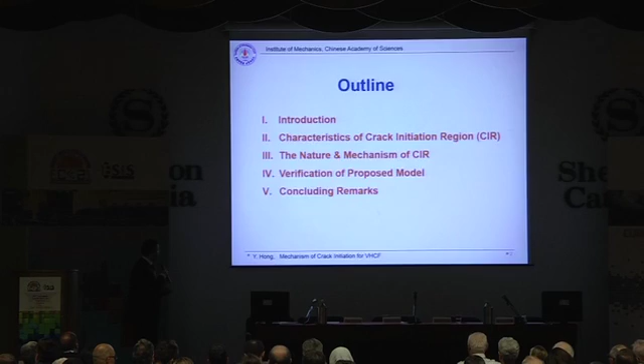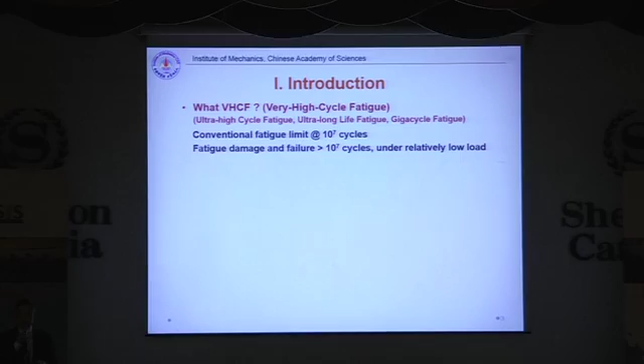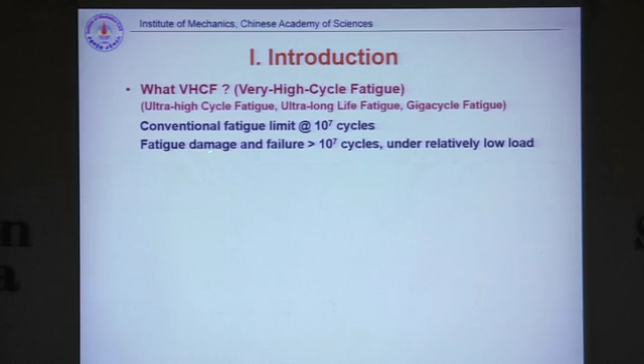First, I would like to mention what is very high cycle fatigue. I think all of us know that the conventional fatigue limit is regarded as the fatigue strength at loading cycles of 10 to the 7. But in recent decades, there are quite a number of research investigations reported that fatigue failure may happen beyond 10 to the 7 cycles of loading, and the related fatigue strength is below the conventional fatigue limit, so this is called very high cycle fatigue.

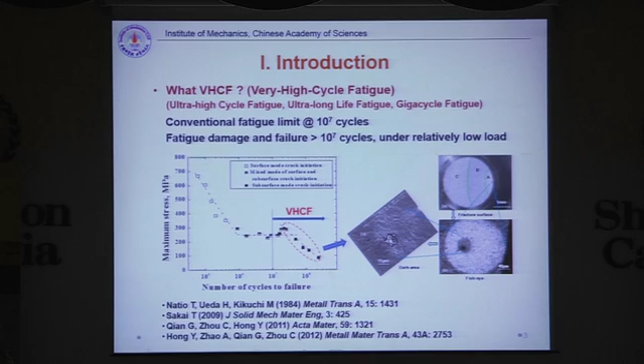This brief example showing in this area is very high cycle fatigue. For very high cycle fatigue, the crack initiation is always from the interior or subsurface of the specimen, and the morphology I will mention in the following slides.

We know that for many engineering structures and components, they all require a large number of more than 10 to the 8 cycles of safe loading. So very high cycle fatigue has very important engineering applications.

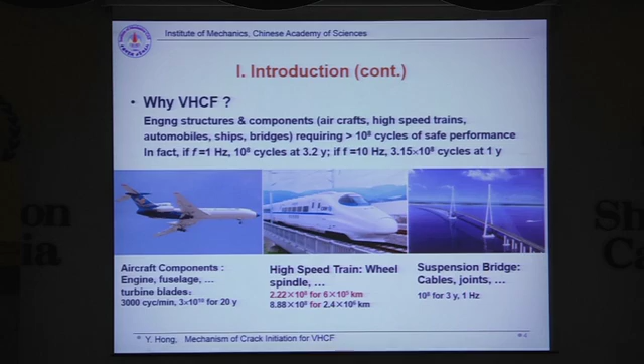This is another example showing what happens in very high cycle fatigue. It shows the crack initiation morphology is a kind of fisheye pattern and also a rough surface of fine granular area. This tells us that for very high cycle fatigue, the mechanism is different from what we know of low cycle and high cycle fatigue.

For that, the crack initiation is always from the surface due to some kind of PSB mechanism. But for very high cycle fatigue, it's from the subsurface or interior of the specimen, so the mechanism is quite different.

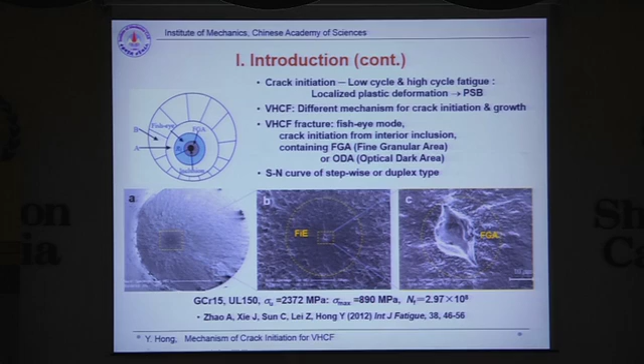So in my talk today, first I will show the characteristics of crack initiation for very high cycle fatigue. Then I will try to answer 2 questions. The first question is, what is the nature of crack initiation for very high cycle fatigue? The second question is, what is the mechanism for the formation of this region?

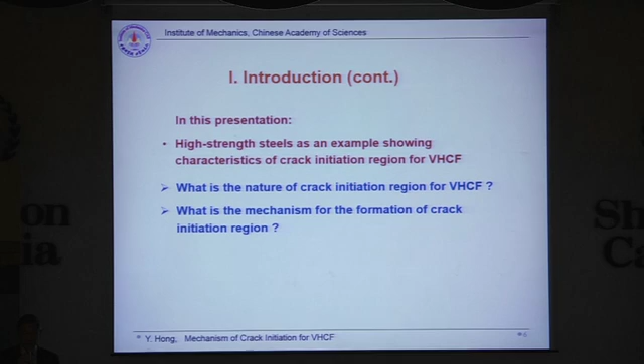Again, this is an example showing the crack initiation of very high cycle fatigue is from the subsurface of the material. For this case, we see there's a morphology called fisheye, and in the center is a kind of rough surface called fine granular area, due to an inclusion as crack origin. For this case, the size of FGA is about 66 microns, and the fisheye is about 206 microns. So now we may have an idea of the size of FGA and fisheye.

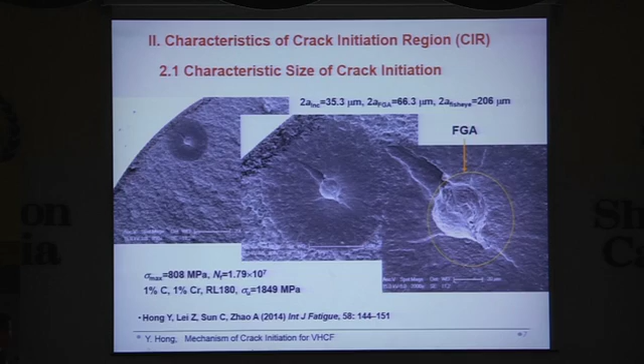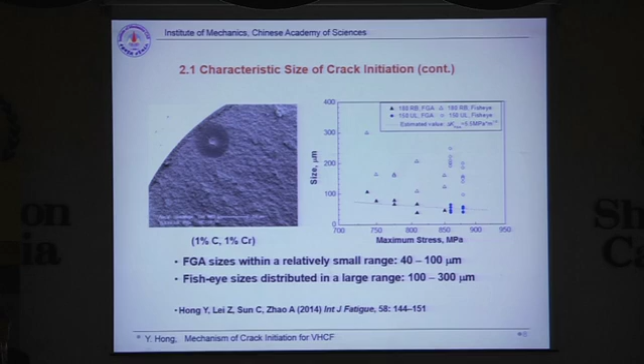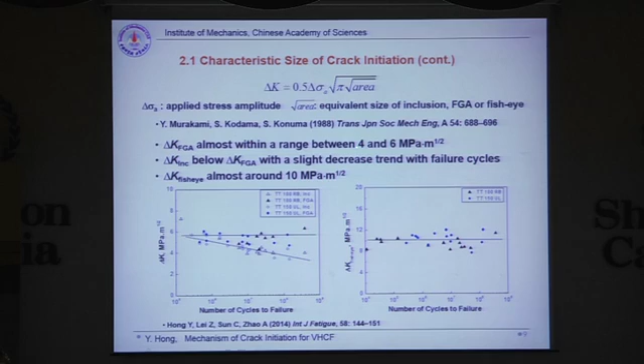We measured a number of specimens to show that the size of FGA is between 40 and 100 microns. We also calculated the delta K for the crack initiation region, that's delta K FGA, and the results show that this value is quite stable. It's between a range of 4 and 6 megapascal square meter.

Then we collected a large number of data from our results and also from literature, and we put two curves. This is an upper bound of 6 megapascal square meter and a lower bound of 4 megapascal square meter. We may see that almost all the data are within this range. Not just our results, but also the results from literature, so all of this data is within this range, meaning that this value is quite stable.

Therefore, we said that this size, the size of FGA, for the crack initiation process, is a kind of intrinsic dimension for crack initiation in very high cycle fatigue. This is our idea, our consideration.

From this kind of consideration, we are able to calculate the fatigue life consumed in this region during crack initiation, and also we are able to estimate the crack extension rate within this small range.

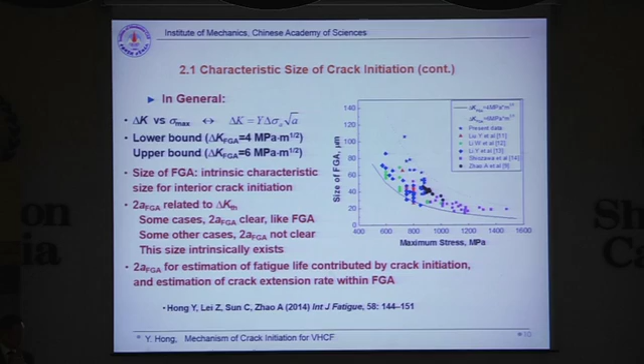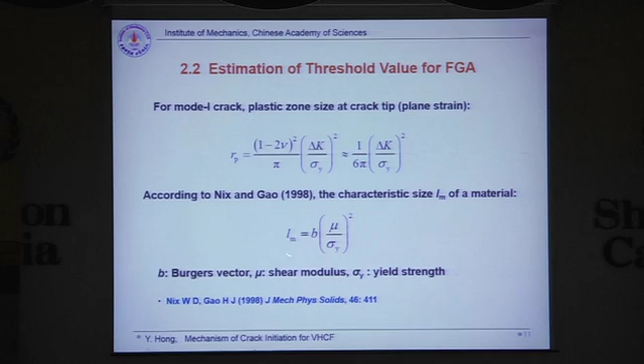But we would just like to take advantage of two formulas of plastic zone size and also the characteristic size of material. We assume that the plastic zone size of the crack equals the characteristic size of the material, so the formation of this crack initiation zone is completed. Under this simple assumption, we come up with this result showing that the value of delta K for FGA is just a function of the shear modulus and Burgers vector of the material.

For this equation, we get the result for steels as 5.5 megapascal square meter. It's in good agreement with my previous slides of 4 and 6 megapascal square meter.

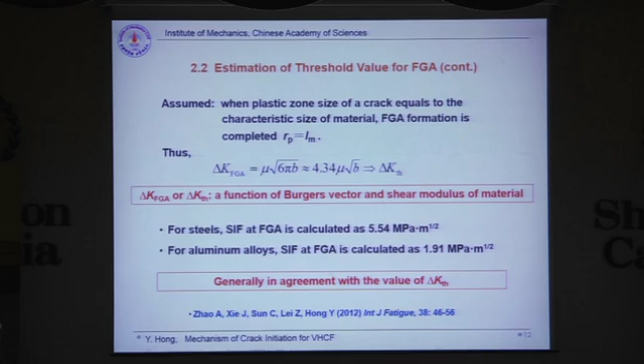Now I will show you the results, the estimations of fatigue life, and the crack extension rates within this small range.

The idea is that the life for initiation is the total number minus n sub 1 and n sub 2. N sub 1 is from the FGA to the boundary of fisheye, and n sub 2 is from there to the final fracture point.

We have the total number of fatigue life, or loading cycles. If we can get n sub 1 and n sub 2, we can obtain the life for crack initiation, using the Paris relation to calculate n sub 1 and n sub 2.

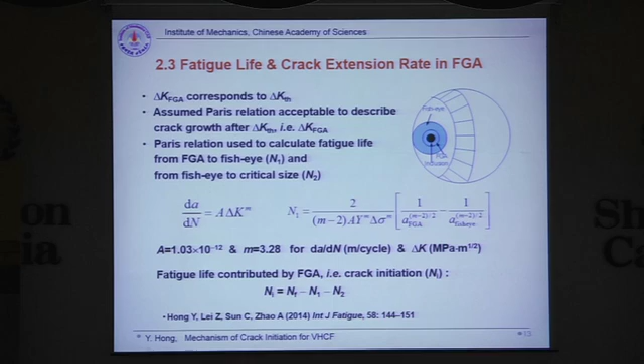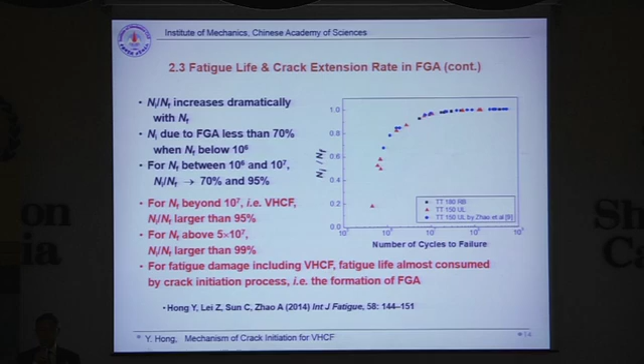We also estimate the crack extension rate within this small range of crack initiation. The value is 10 to the minus 12 to 10 to the minus 13 meters per cycle, which is very, very slow.

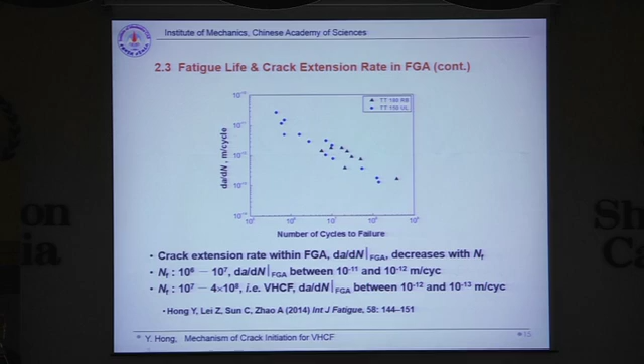So I'll summarize the previous slides for very high cycle fatigue of high-strength steel. First, the crack is initiated from the interior material. Second, the morphology shows fisheye and FGA patterns. Also, the value of delta K is stable and is a function of Burgers vector and shear modulus of the material. A large part of fatigue life is consumed by the crack initiation process.

Finally, FGA, the crack initiation region, is the characteristic region for crack initiation in very high cycle fatigue. So now we understand that the initiation process is very important.

Therefore, we ask two questions. First, what is the nature of FGA? Second, what is the mechanism of this region's formation?

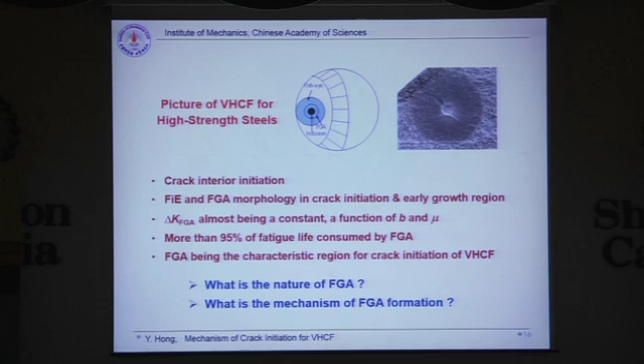Before describing our results, I would like to briefly mention some previous models. The first is hydrogen-assisted crack growth to form the FGA region. The basic consideration is that this type of rough surface is due to the existence of hydrogen inside the material, and the interaction between hydrogen and material defects or damage causes this rough surface during fracture.

The second model is called decohesion of spherical carbides to form the FGA region. The basic consideration is that because there's an existence of spherical carbides in the steel, the bonding or cohesion between the carbides and the material causes the formation of a rough surface during fracture.

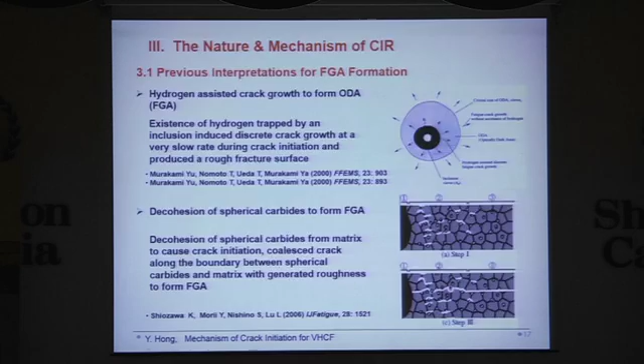The third model is called formation and debonding of the fine granular layer. The main consideration is that before crack growth, there is a kind of plastic deformation causing the formation of a fine granular layer. During the cracking process, there is a debonding between the fine granular layer and the matrix.

This causes the morphology of a rough surface. There are also a couple of additional models similar to this debonding of the fine granular area to form this kind of rough surface.

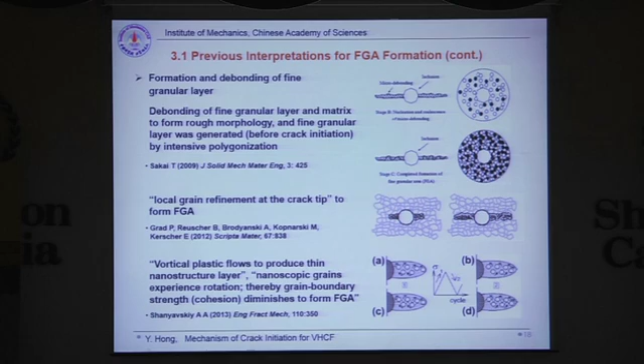But these types of models cannot explain some experimental observations. I will show you some cases.

This one is a kind of medium carbon steel. We may see a morphology of fisheye pattern, but there's a very clear initiation region without the morphology of so-called FGA.

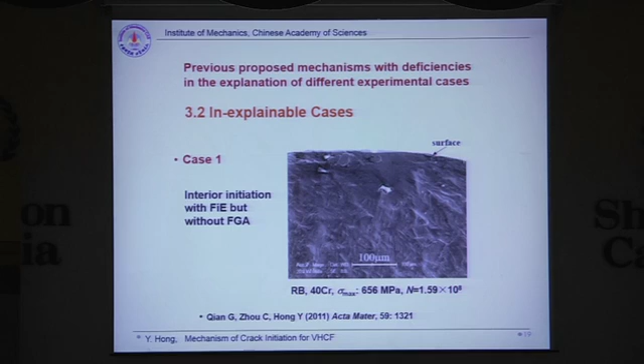The second case is also from a kind of medium carbon steel, and we also see the morphology of fisheye, but without FGA pattern.

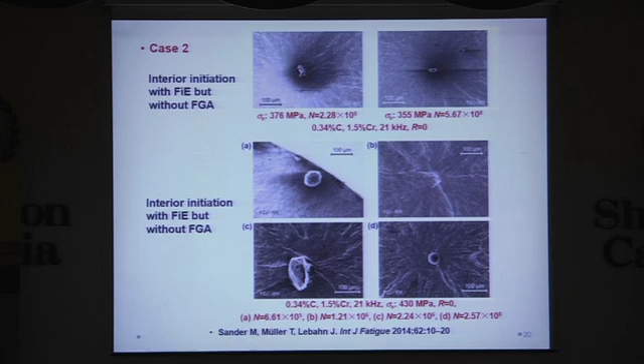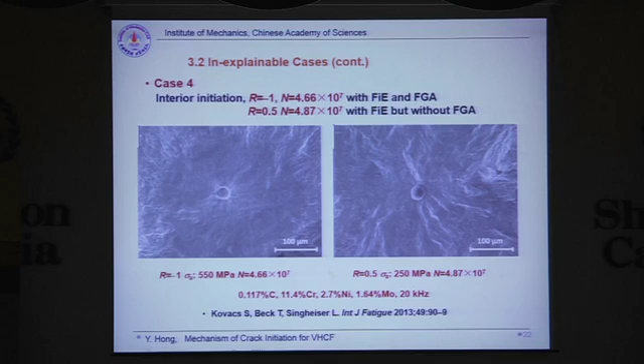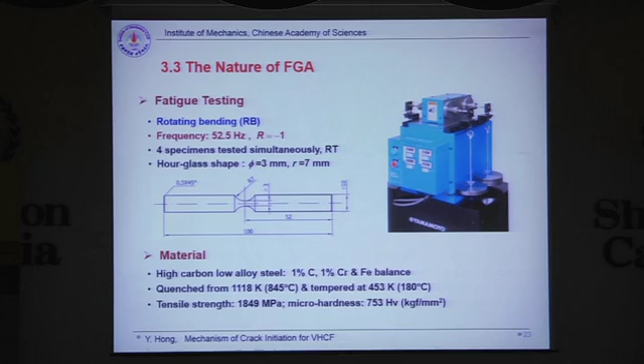Therefore, we try to reveal the real nature of this very important region that consumes such a large part of fatigue life. We use the ordinary rotating bending method, with stress ratio of -1, and a high strength steel for this testing.

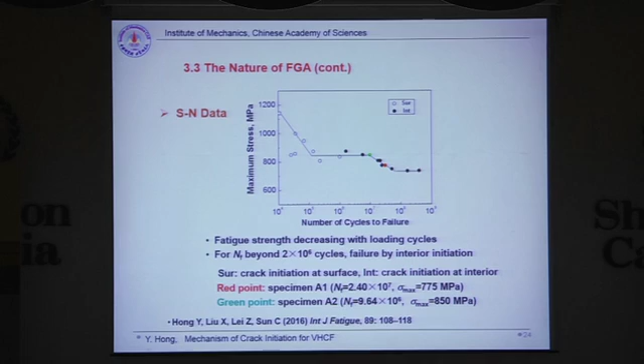From this fatigue data, we chose two specimens for detailed observation, the green one and the red one. The red one failed in a very high cycle fatigue regime.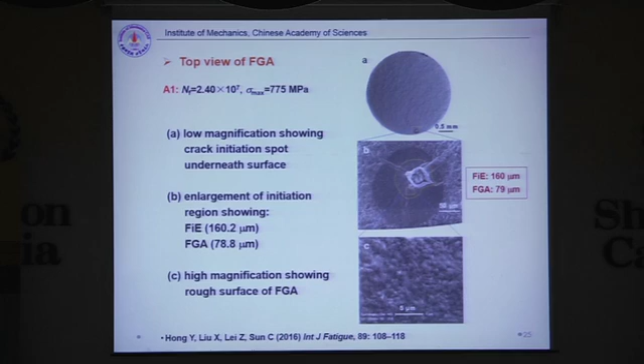There's a top view from low magnification to high magnification showing a rough surface during the crack initiation process. Then we used ion beam polishing to get a kind of profile sample, and we observed this initiation region.

In this initiation region, we see a kind of layer about 650 nanometers of rough surface.

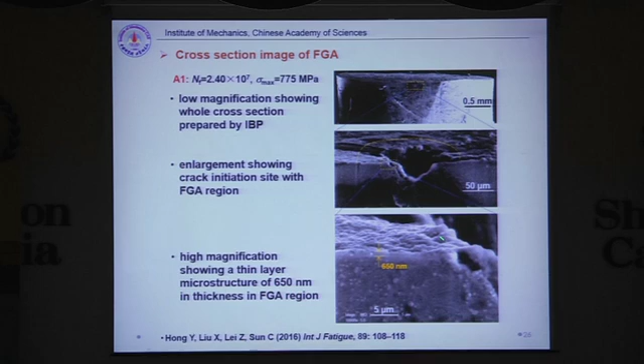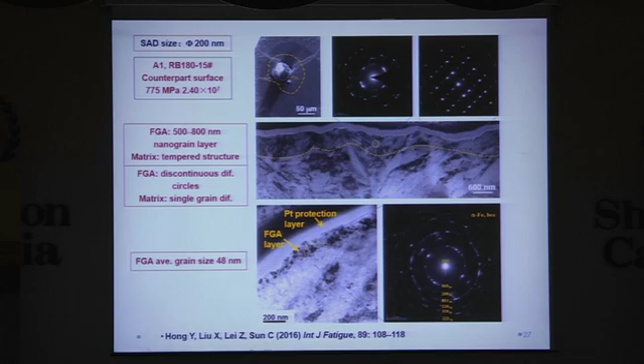Then we further used the technique of focused ion beam cutting, to cut the specimen at the location of crack initiation region. The TEM image shows that underneath the fracture surface is the region of FGA, a kind of fine microstructure, while inside the fracture surface is a kind of coarse microstructure.

We also used selected area diffraction, SAD, with a size of 200 nanometers. We saw that at the location of the FGA region there are discontinuous circles, but inside the specimen there are isolated spots, meaning that area is coarse microstructure, while the FGA is fine structure, meaning there are a number of grains inside this small 200 nanometer area.

This is another result showing that in the region of the FGA area, the diffraction shows discontinuous circles, and our measurement shows that the grain size is 48 nanometers on average.

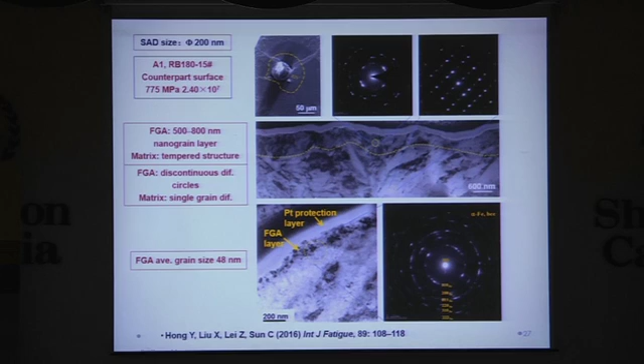Then we observed another specimen, the green specimen, using both fracture surfaces, the negative part and positive part. We cut the FIB sample from almost the same location to see how the morphology compares on both sides of the specimen.

For this negative and positive fracture surfaces, we see that at the FGA location there are discontinuous circles. Outside, we cut the FIB sample just between or across the boundary of fisheye and FGA, so part of the FIB sample is FGA region and another part is fisheye outside FGA.

This shows that the part outside FGA is almost all isolated spots, so only the region of FGA is a kind of fine microstructure, and again in the area of FGA there are discontinuous circles.

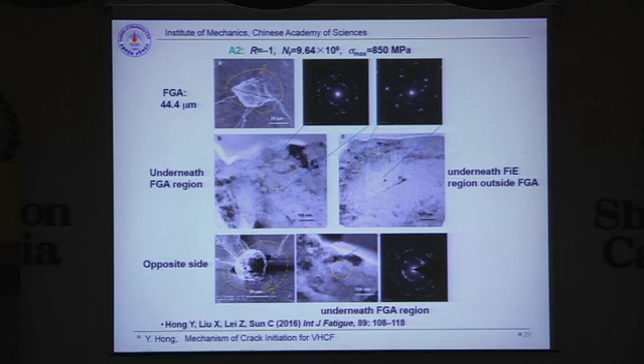Therefore, we propose this kind of model called Numerous Cyclic Pressing, NCP. It says that first, a crack will form, perhaps by the debonding of inclusion and matrix, with some kind of localized plastic deformation.

After the formation of the crack, there will be a kind of contacting between the crack surfaces. This type of contacting is associated with the crack closure effect and also the relaxation of residual stress, and this process repeats again after millions of cycles of loading. This is the main concept of our model.

Due to this kind of contacting between the originated crack surfaces, such a nanograin layer is produced.

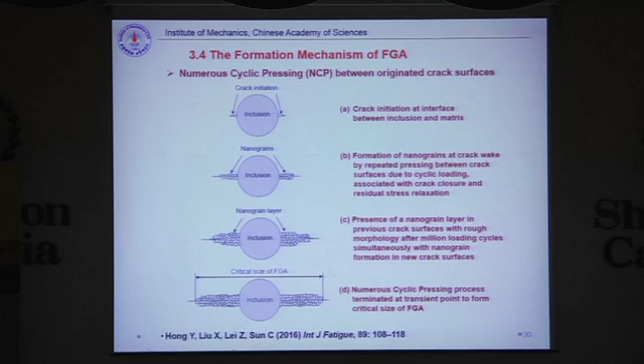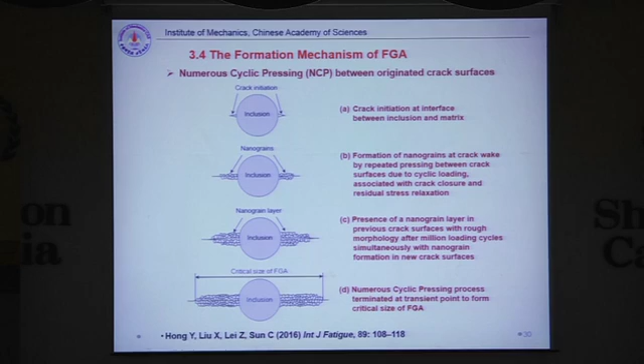Some of you may know the concept of severe plastic deformation producing fine or nanograins. We think this type of crack initiation is similar to that process, producing fine or nano-sized grains. Now we will try to verify our proposed model.

To verify this, we have two predictions. The first is that because this process is due to contacting of the crack surfaces, for a positive stress ratio there will be less action of the crack closure effect, so this kind of nanograin layer on fracture surfaces will be less likely.

The second prediction is that even for a negative stress ratio, for example -1, if the number of loading cycles is not sufficient, this type of fracture surface with fine microstructure will also be less likely.

Then we carried out another group of experiments, this time using the method of ultrasonic fatigue testing, also with a high strength steel, and the stress ratio is -1, -0.5, 0.1, and 0.3. This is the facility, an ultrasonic machine equipped with an ordinary tensile machine.

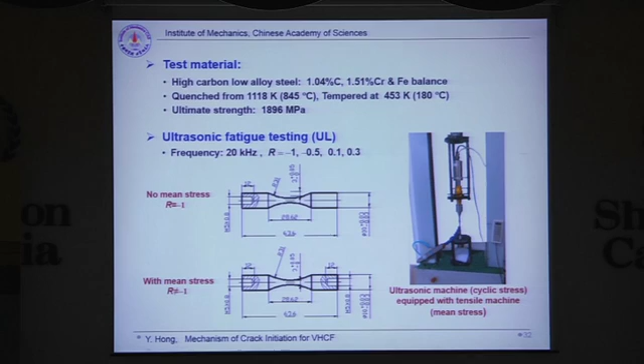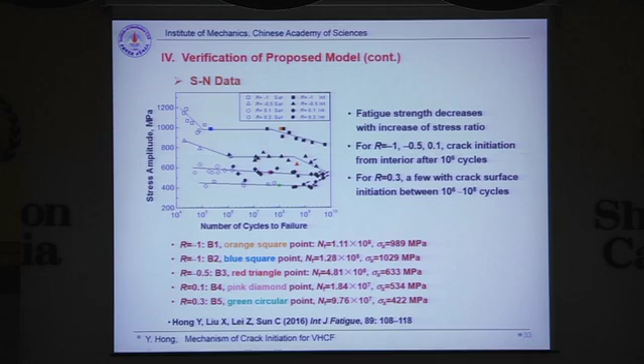Perhaps I have had to rush, right? It's almost the time. So I would just like to show you the result of this.

This is the -1 stress ratio with relatively low loading cycles, and we see it's a kind of slightly elongated diffraction pattern. It's a kind of texture microstructure, meaning that within this small range, or small area of SAD, it's just perhaps a couple of grains.

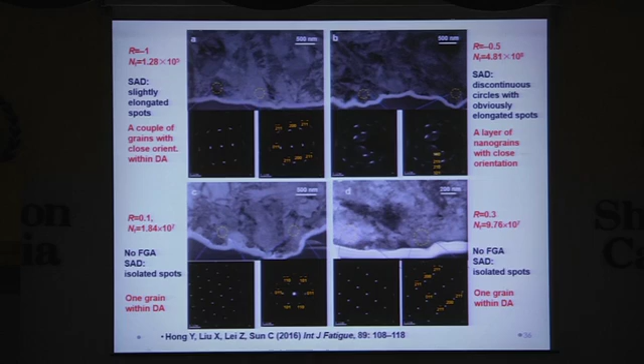For -0.5, it's also elongated diffraction. But for 0.1 and 0.3 stress ratio, just underneath that fracture, the crack initiation region shows isolated spots. So these observations verify the first prediction, and these verify the second prediction.

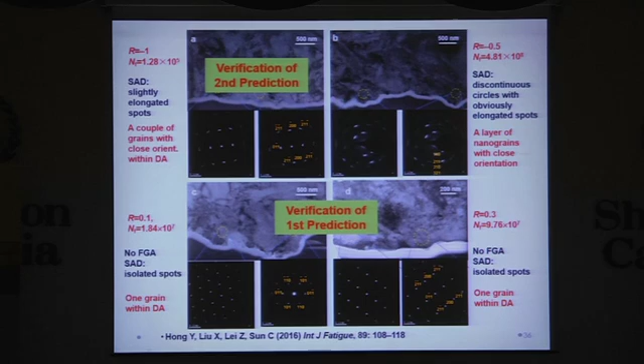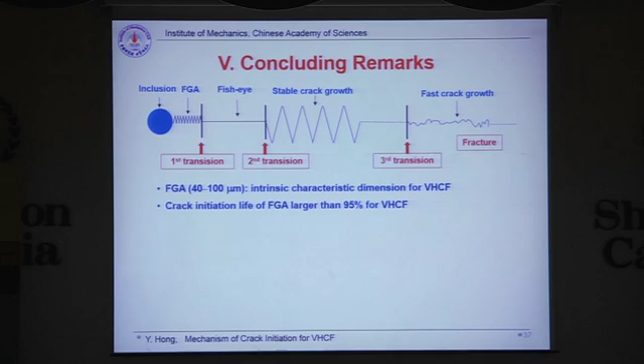Now I conclude my talk. First, the region of FGA is very interesting and important, and its size is between 40 and 100 microns - an intrinsic characteristic dimension for very high cycle fatigue. And the crack initiation life is larger than 95% for very high cycle fatigue.

The nature of FGA is a layer of nanograins, about 500 to 800 nanometers on both surfaces, with grain size about 50 nanometers.

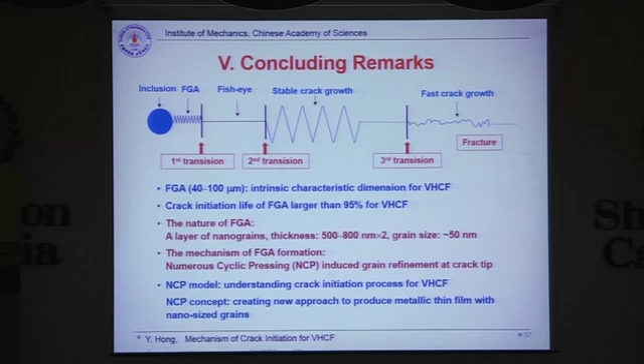The mechanism of FGA formation is due to numerous cyclic pressing induced grain refinement at the crack tip. This model may provide insight for understanding the crack initiation process for very high cycle fatigue, and also this concept could help create a new approach to produce metallic thin film with nano-sized grains. I think that's all of my presentation.